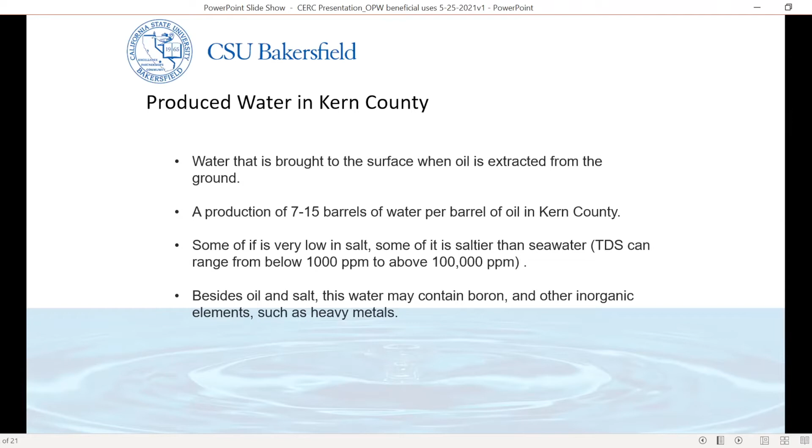Some of it is almost like fresh water, so it doesn't have many inorganics other than oil, but some of it has a lot of inorganic components like salts or heavy metals, and some of it has more salt than seawater, so it can be very salty. Besides oil and salt, it can have some boron and other inorganic materials and heavy metals.

So what do they do with the produced water? If they don't have a way to dispose of this water, they don't have oil production. As I say, it's a very large volume of water. Usually there are three ways they dispose of it. One is underground injection into disposal wells, as the last presentation was referring to. They may also use it for enhanced oil recovery, such as steam injection.

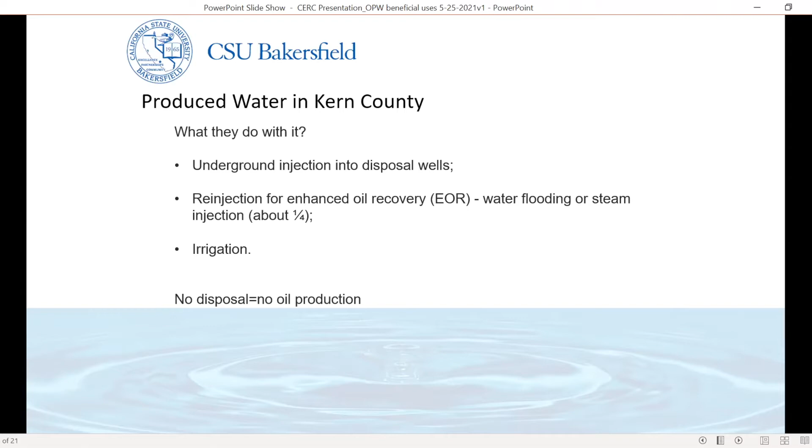Sometimes they need to remove some hardness or some components from the water, and then they can produce steam. The other one is irrigation. The oil companies give the water to water districts, and they distribute it to the farmers. So how is the water usually cleaned for irrigation?

For irrigation it's a very simple process. You obtain it from the oil field, then there is a process where you separate most of the oil. There is different equipment to remove most of the oil; it could be by gravity, it could be by air flotation. Once the majority of the oil has been removed, the water goes to another step.

Usually they use walnut shell filters. The oil sticks to the walnut shell, and that way they remove almost all the oil from the water. Once the water is at this stage, it goes to the water districts, to the canals, and from there it gets distributed to the farmers. So that's the usual way they do it.

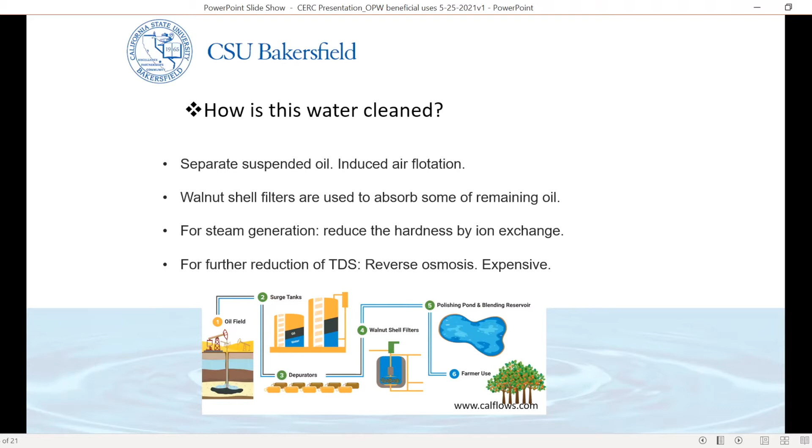If they need steam generation, they may remove the hardness or the calcium to produce steam. Or if, once they remove the oil, the water is still too salty to be used for irrigation or other purposes, they may need other processes. A common one is reverse osmosis, but this process involves high pressure, so the equipment is expensive, and operating it is expensive as well.

So what I'm going to talk about is a particular process to remove the oil from the water, which is electrochemical oxidation. The process is quite simple. In an electrochemical reaction, you only use electric current and apply it to electrodes submerged in the water. Depending on what material you use for the electrodes, you can have different reactions in the water.

For example, for produced water, it's common to use aluminum electrodes, and the aluminum goes into the water. These aluminum ions coagulate the oil particles, gluing them together, and that way they can either float them or sink them, depending on how they want to remove the oil.

So that's one of the typical processes they do, but we can use different types of metals for the electrode. So iron, it could be. In our studies, what we use is called mixed metal oxide. So basically it's a titanium substrate, a titanium alloy substrate, and it's usually coated with rare metals: iridium, ruthenium, platinum.

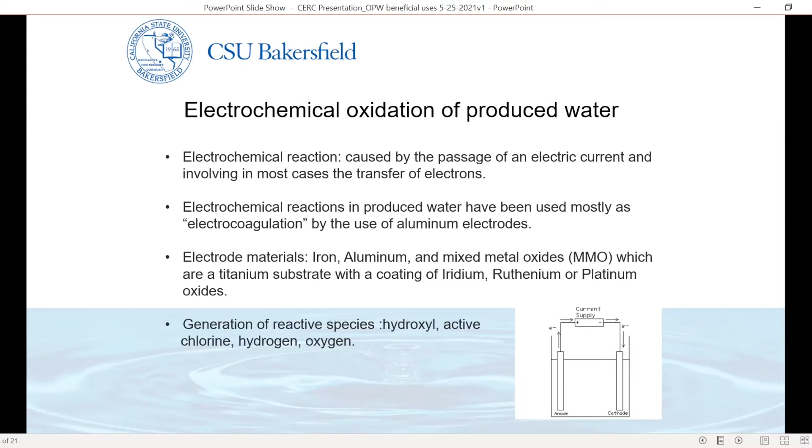And by using these particular electrodes, we generate very reactive species, so hydroxyl, active chlorine, and we also, of course, do electrolysis. We do produce hydrogen and oxygen. So there are different configurations that we have worked with in other projects and in the past, some of them in collaboration with industry. So depending on the purpose of the treatment, we use many different types of configurations.

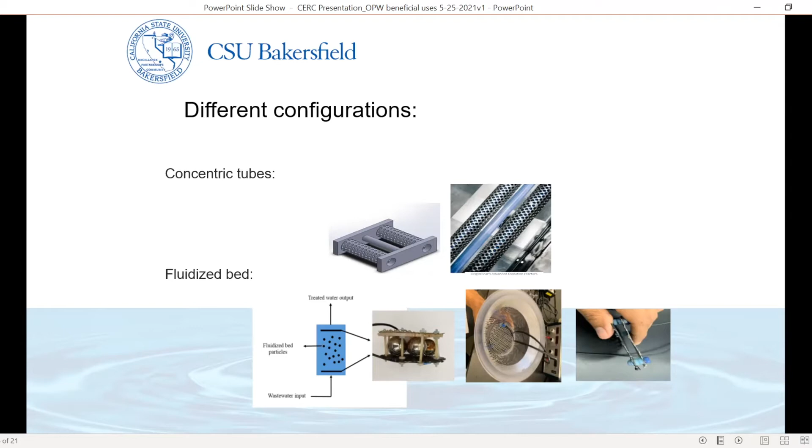So we have concentric tubes. So the anode and the cathode are actually concentric tubes, and the electrochemical reactions happen in the gap between the metals. We have used before a fluidized bed reactor, which has a little bit better efficiency because it has a higher contact surface. And then what we are trying to do now is a multi-cell configuration. This is the project we are working on.

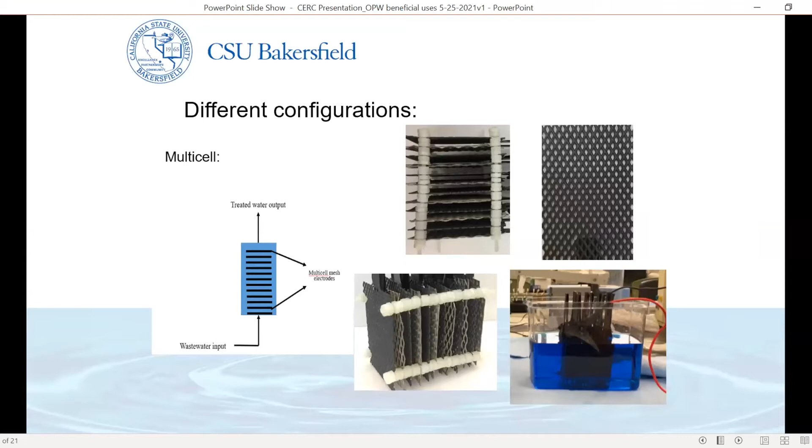And in this multi-cell configuration, we have different layers of anode and cathode. So we have the MMO, and then we have a stainless steel cathode. And so we have 7 of them. And as you can see, there is a mesh. So the mass transfer in this particular reactor is quite high. We tested it, as you can see in the picture, in a batch process, but actually this type of configuration could be used as a continuous process, and due to the high surface area, it could have a very good reaction.

So what we do first is test it with a blue dye, because we can control the concentration of this blue dye very well, and we use it to fine tune the characteristics of the reactor. So as you can see, as we increase the amperage, the reaction is faster. So we destroy this blue dye much faster as the amperage increases up to a certain level. So beyond 4 amps, the gain in efficiency is not that great.

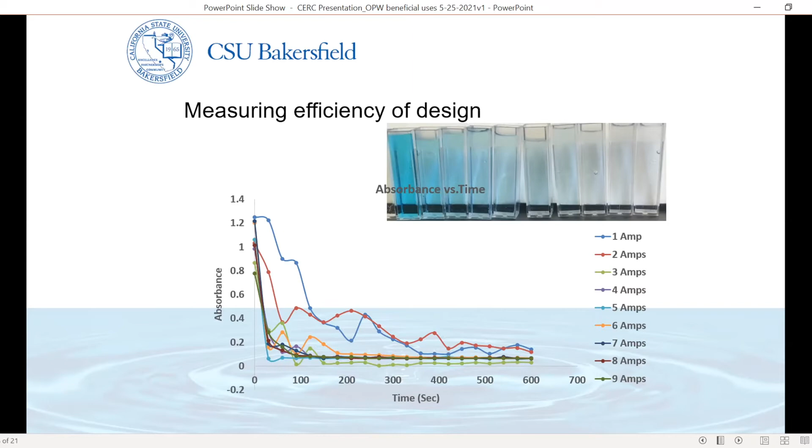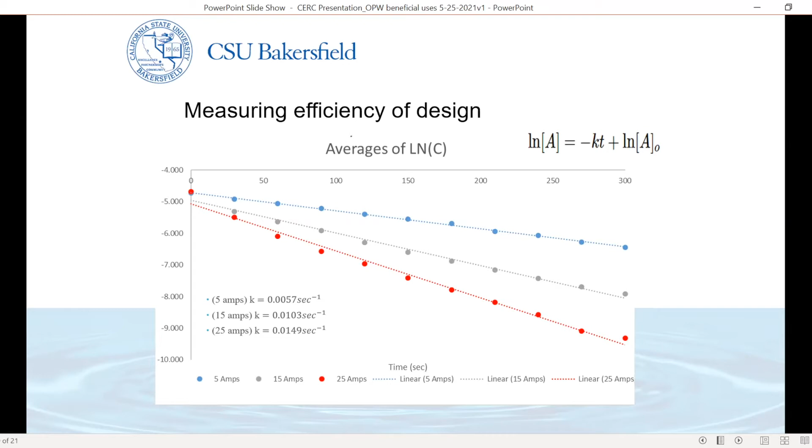So once we have this type of data, actually the students got all this data, we analyze it, and we do a simple analysis in order to measure the efficiency of each setup. So that's what we do. And then once we have our instrument parameters set up to be the most efficient, we test it in produced water. So produced water is sometimes variable. Depending on where you obtain it, it depends how much oil you are going to obtain.

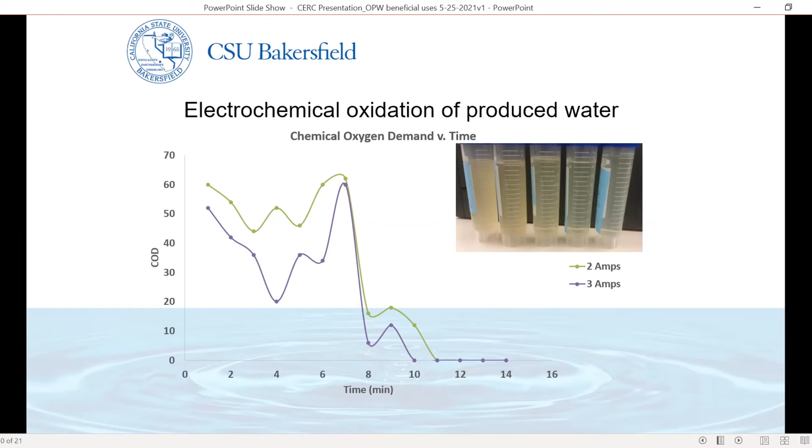And what I did in this research is look into the key questions as to what are the key barriers to widespread adoption of produced water for irrigation of crops, given that Kern County's major industries are oil and gas and agriculture, and what we could do to overcome those barriers.

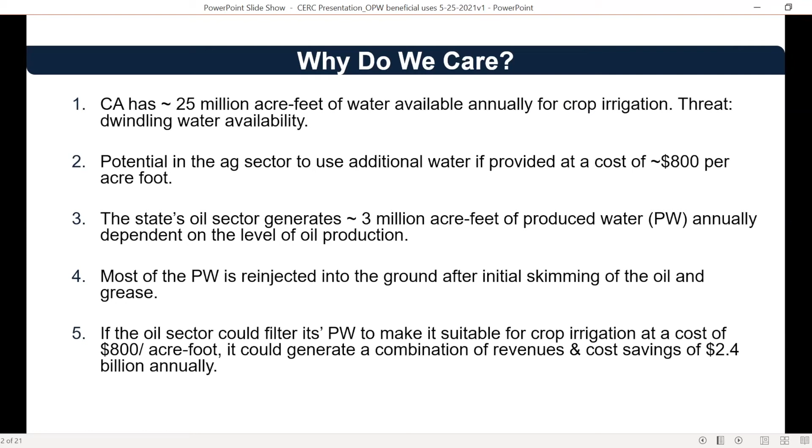Next slide, please. Okay, so what I have done here basically in the first phase, along with two of my students, Brandon and Ariel, we conducted around 26 semi-structured interviews, and it was all through Zoom because we went into the pandemic right after we got the grant from Chevron, and thanks to them. We conducted interviews with the 5 major stakeholder groups in this oil field produced water ecosystem. These 5 stakeholder groups were mainly oil and gas managers and business owners, ag industry experts and farmers, entrepreneurs, water district managers and water board personnel, and environmentalists.

So here, I should have given a diagram, I know, showing the main themes that came out of the analysis of these interviews. But these are some of the major insights that were revealed. First, definitely the high cost of water treatment, resulting in not being able to provide the final product, that is, treated produced water, at a reasonable price to the food producers. Lack of one-stop shop for treatment technologies, lack of funding, lack of commercial interest in water management. And as of now, there is no known penalty for re-injecting the water back to the ground.

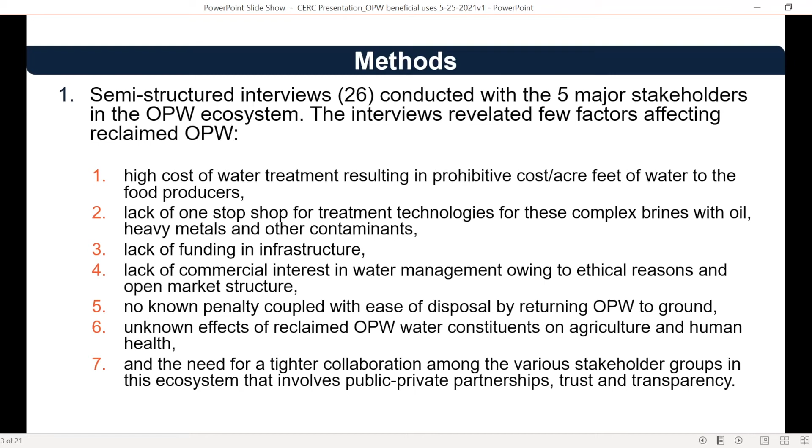And despite so many scientific studies, still, effects of reclaimed produced water constituents on agriculture and human health continue to be unknown. So the people all kind of agree definitely on the acute water shortage and that alternate water streams are required, but they also felt that there should be a tighter collaboration with trust and transparency, most likely along the lines of public-private partnerships. Next slide, please.

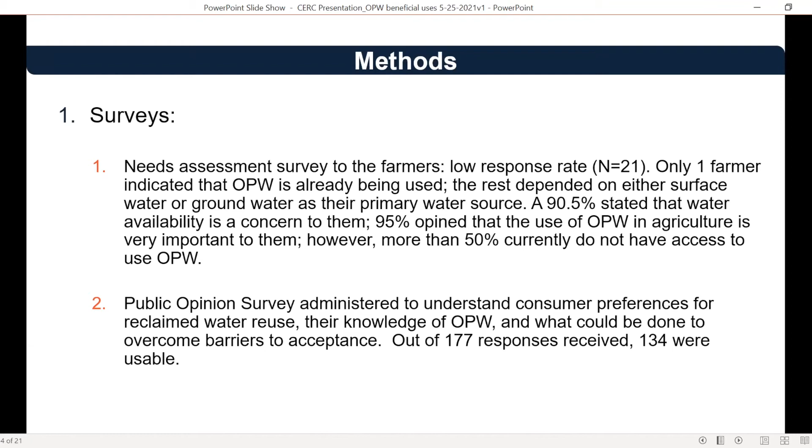Okay, and in the second phase, what I did was I developed 2 surveys. The first survey was a needs assessment survey to the farmers. And out of the 21 responses that I got, only 1 farmer has been using produced water, but a major portion of them really wanted to use produced water and felt that it could be important. The second survey was kind of like a public opinion survey where I administered it to the people in and around Bakersfield. Next slide, please.

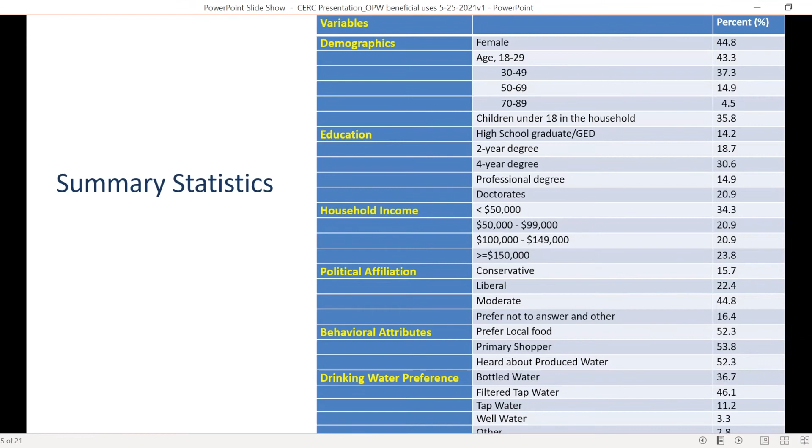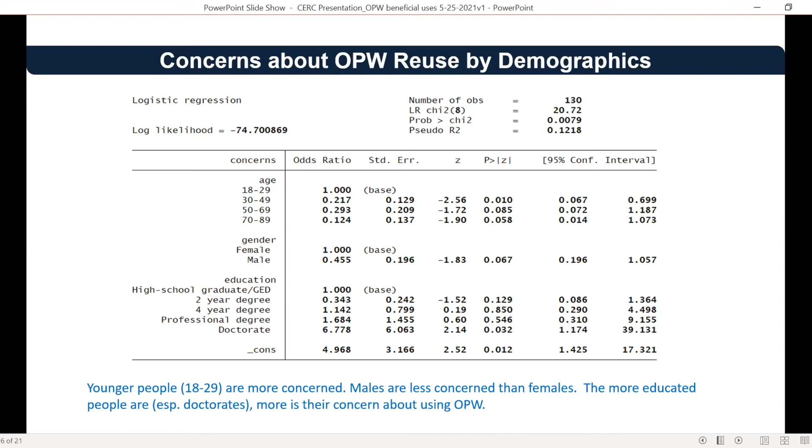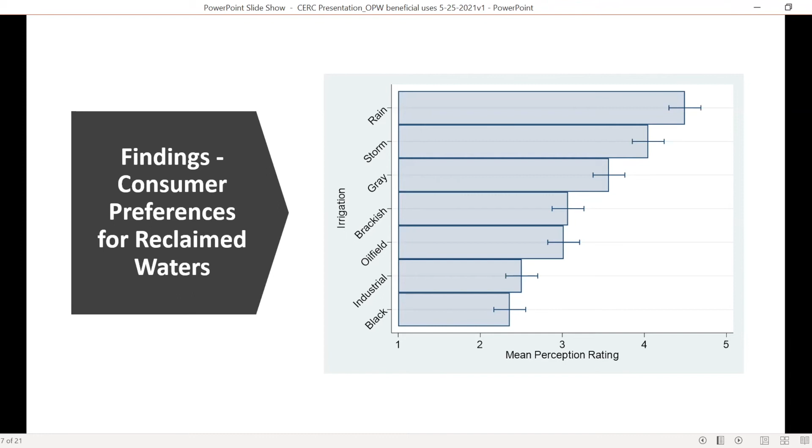Okay, so this graph shows consumers' preferences for different kinds of reclaimed waters, including oil field produced water. Consumers rated this on a Likert scale, where 1 is dislike and 5 is like. As you could see, people really prefer rainwater followed by stormwater for irrigation. And interestingly, they actually scored oil field produced water above industrial water and black water for irrigation of crops.

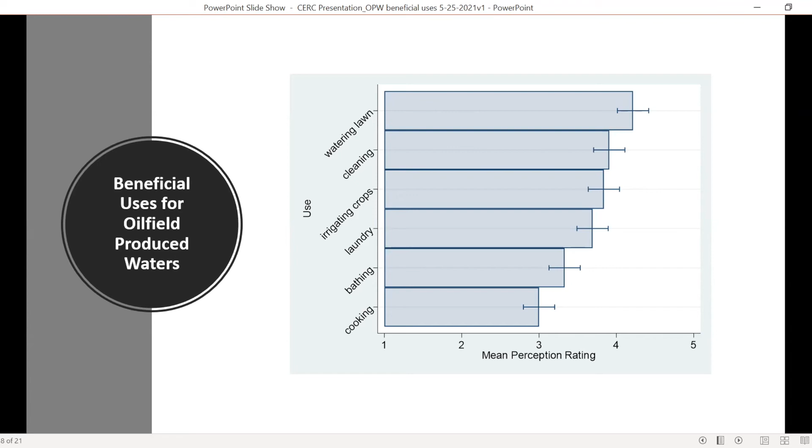This graph shows the different beneficial uses that produced water could be put to. And here, people really showed interest in using produced water more for external use, like for cleaning or maybe even watering their lawns, even irrigating crops, rather than using it for more direct consumption, such as cooking or even bathing and laundry, which is again very close to the skin. So people were not very confident about that. And in fact, it showed 90% less preference in using produced water for cooking compared to using it for irrigation.

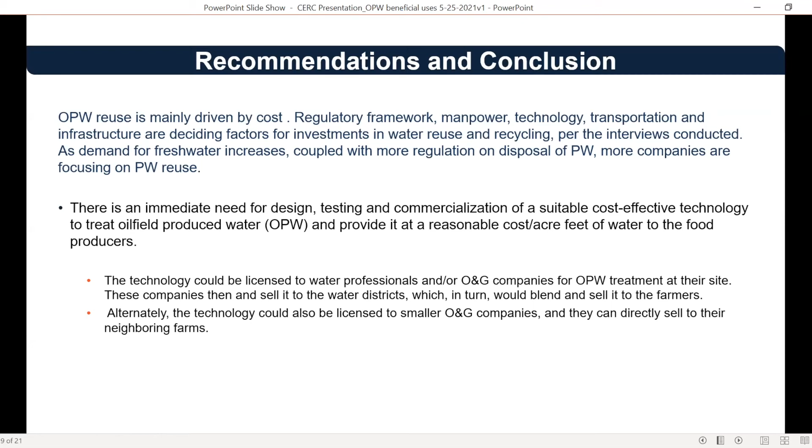So in sum, what we have found, and earlier research has also kind of established, is that OPW reuse is mainly driven by cost. So when oil and gas companies are making decisions about investing in water reuse and recycling, they are thinking about so many of these different things. But given some of the new regulations and the dwindling freshwater supplies, more companies are focusing on produced water reuse. So the finding has been that there is certainly an immediate need for design, testing and commercialization of suitable cost-effective technology to treat this water, so that we could provide this water at a reasonable rate to the farmers. Next slide, please.